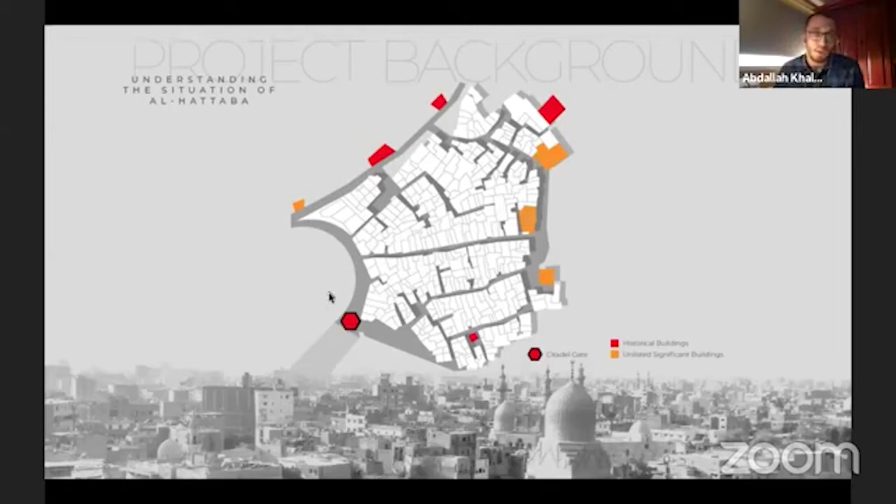It's directly adjacent to the Citadel in Cairo, so it completely lies within its buffer zone. To understand the situation of Al-Hattaba, it has several historical monuments marked in red in the layout here.

It also has a significant urban form, considered a heritage in itself. Also, it's home to many crafts, most dominantly carpentry, mother of pearl inlay, and khayamiyya.

However, in recent years, the Citadel Gate in Hattaba got closed, marked here in the red polygon. This led to various issues, such as financial struggle for the crafts, and everyone working in tourism is now more or less looking for something else.

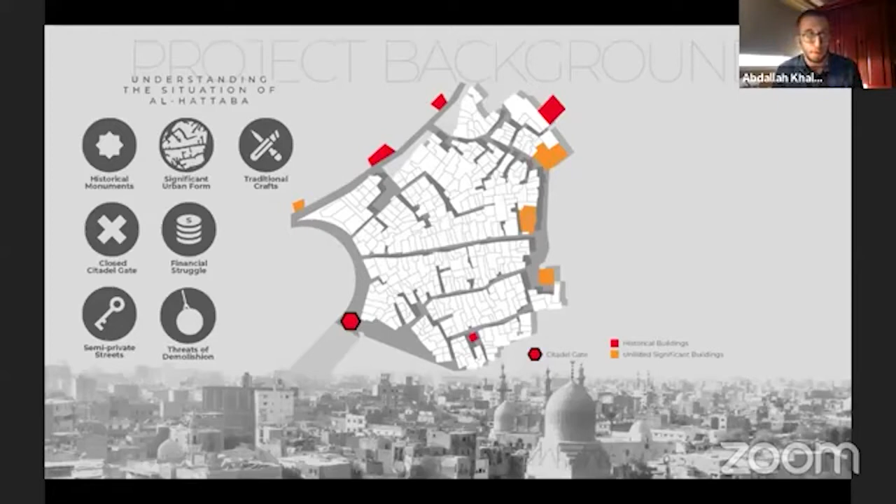The streets were turned into semi-private areas for the residents, since no tourists or outsiders are moving through them. Even the residents are facing threats of demolition from the government for several developmental projects and so on. However, none of them has been realized so far.

Also, there are building restrictions, since it's in the buffer zone of the Citadel — no one can build on vacant land. It's very hard to refurbish your home, modify it, or so on.

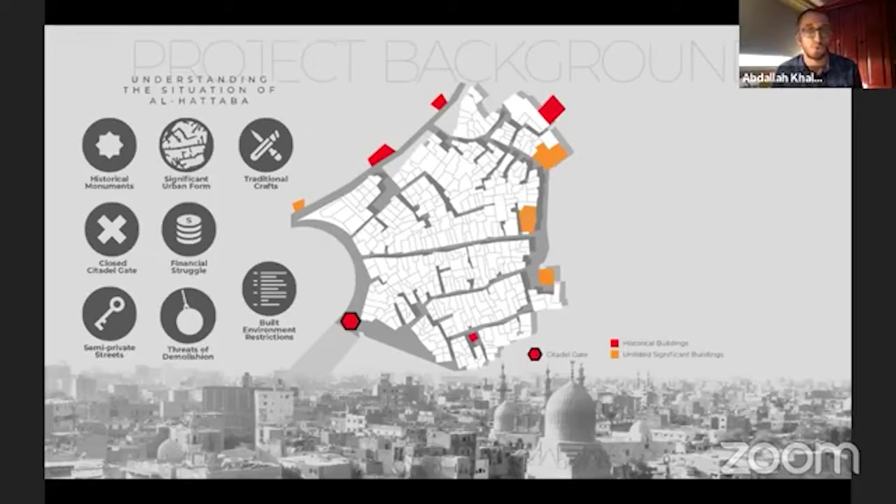However, in recent years, several initiatives kicked in with projects that got accepted from the government. The most dominant is the project from Athar-Lina.

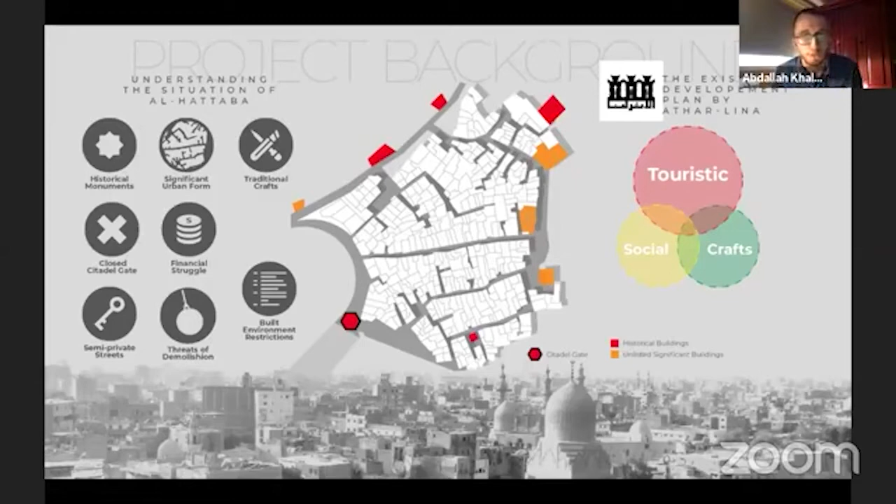It's a touristic social crafts project, mainly aiming to establish the red zones as touristic areas so tourists can move around Al-Hattaba, passing through the historical buildings, the green area as a crafts area, and the yellow area as a social area with some services such as police departments and so on.

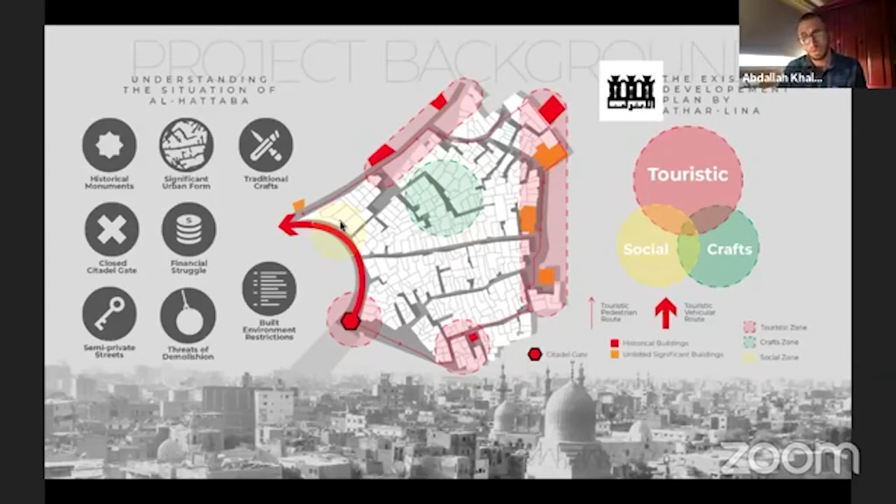So we started thinking, what's next for Al-Hattaba? There's this general theme that emerged: Al-Hattaba, as a plan for the future, has the tourists on the periphery and residents on the inside.

So we started to think more about the residents — how the inner streets of Al-Hattaba can accommodate them. The residents became our main stakeholders, with the craftsmen as secondary, and even the neighbors and the government as secondary stakeholders.

Our target impact is 4 axes. The first is functionality of the neighborhood for the crafts and for the residents. Second is identity, emphasizing it as unique and pleasant. Third is the financial return for the residents.

They are already drained financially because of the past years. And last is providing a leisure mood for the residents, in order to give a more livable area.

So our project, or our scope — we started thinking that Al-Hattaba is a multi-issue area. We cannot provide one solution for Al-Hattaba to imagine it better for the residents. So we decided to solve it issue by issue, providing an abstract guide to interventions in Al-Hattaba.

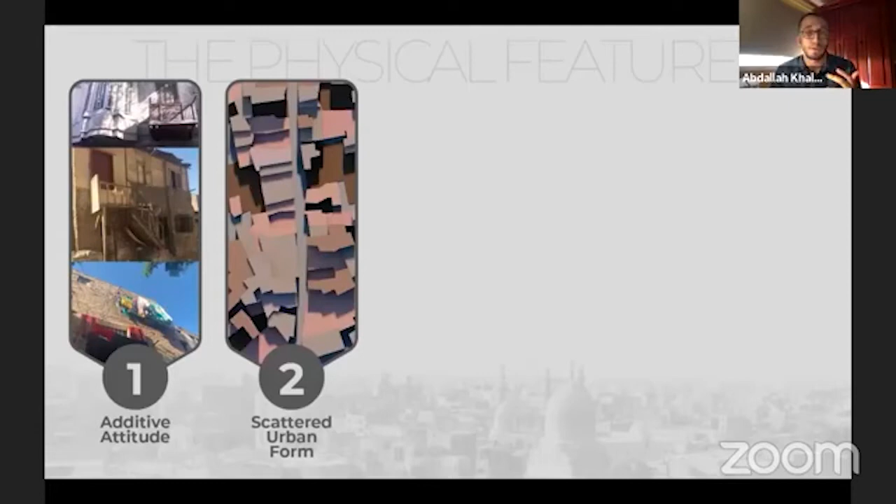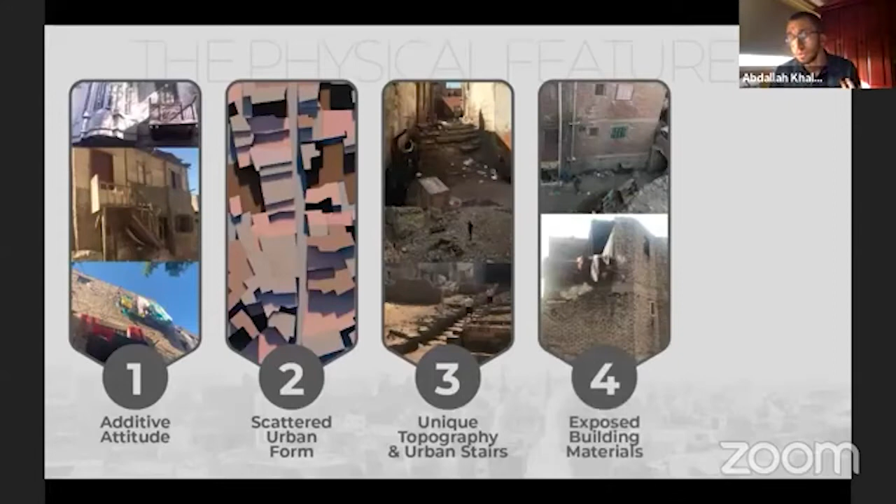Third is unique topography — Hattaba has very steep topography, leading to stairs on the streets and so on. Fourth is the exposed building materials; we will have more details about that later. And fifth is several dead-end streets on the layout.

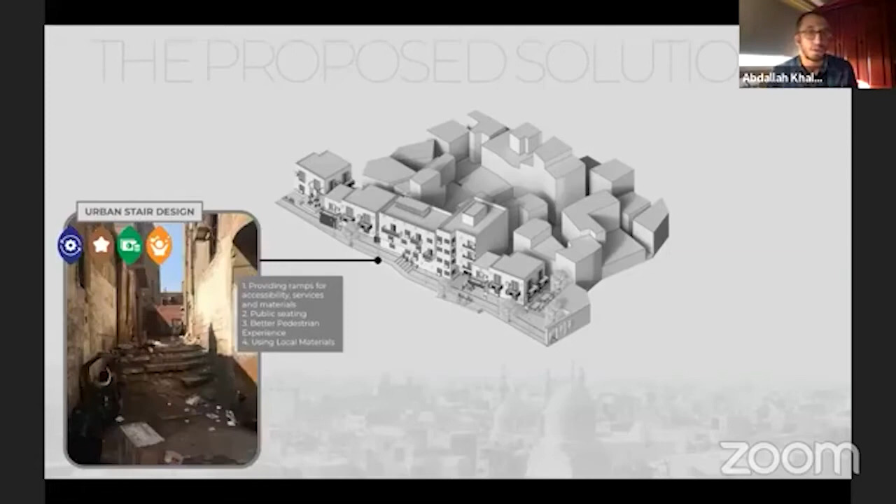So here is more of a prototypical street in Al-Hattaba with some of the physical features we described earlier. The first thing we thought about as a solution is having an urban path, how to define the path for the pedestrians and how to accommodate for the different needs.

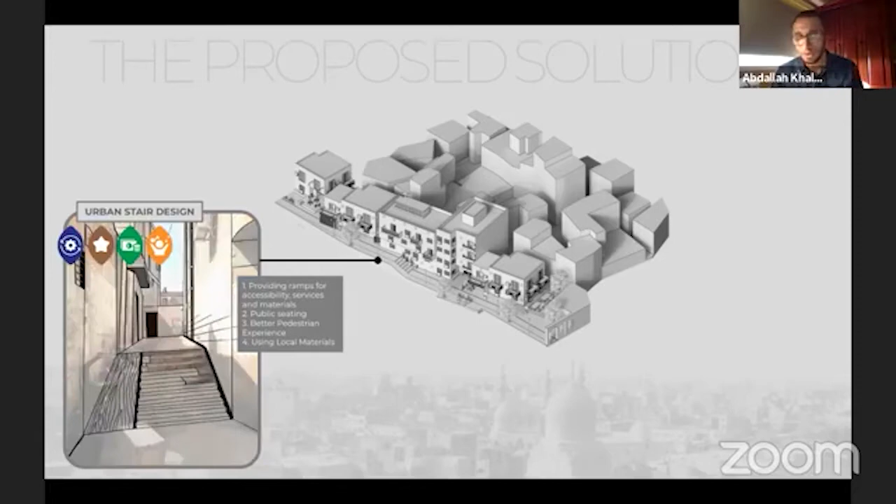So solving a prototype of stairs in Hattaba would be having a ramp for the services and materials to reach the crafts, and having seats for the residents to have this leisure mood we're talking about.

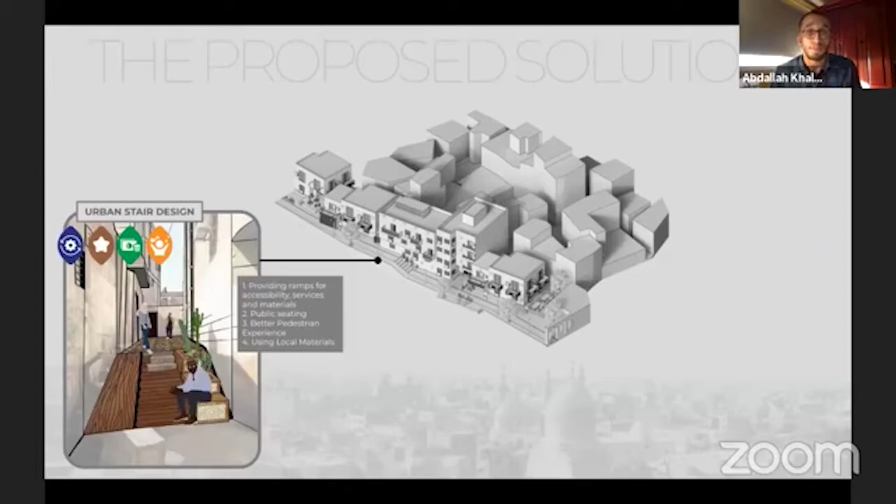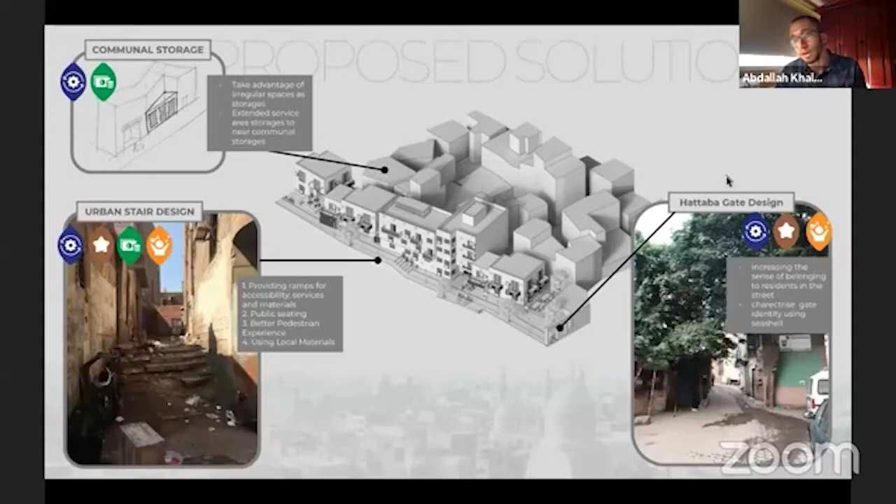Also having communal storages in the areas between the buildings. On the right here, we're talking about a proposed idea for a Hattaba gate, mimicking the gates of Cairo and so on, which will add more details to Al-Hattaba, as in more solid identity for the residents and even the neighbors.

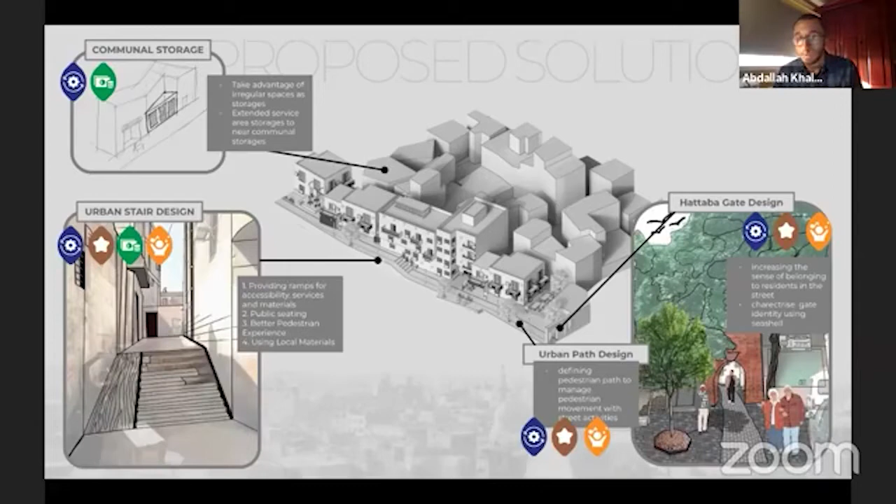Then this is the path we're talking about. It defines the pedestrian path to manage the movement and street activities. Also, we're proposing several solutions that are inspired from the crafts, such as this flooring inspired by the seashell inlay craft. Also, the dead end areas can have several solutions.

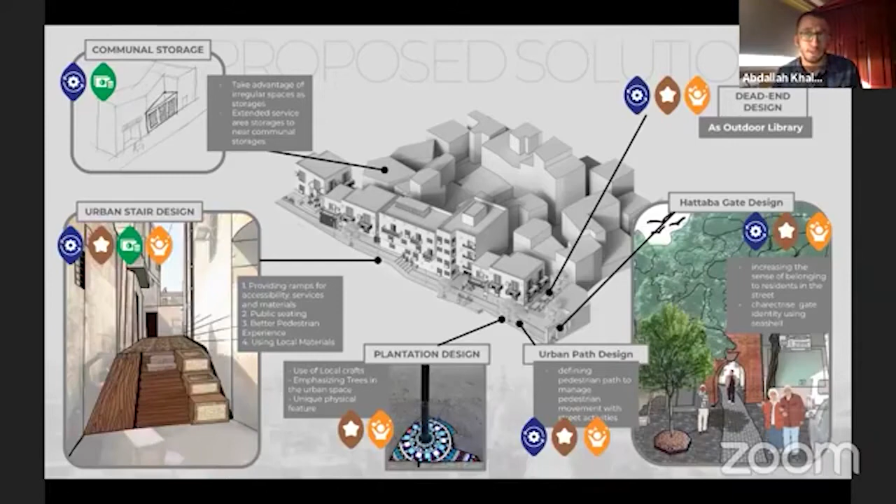One of them is outdoor libraries. We will explore more solutions about that next. That's another solution for the dead end areas.

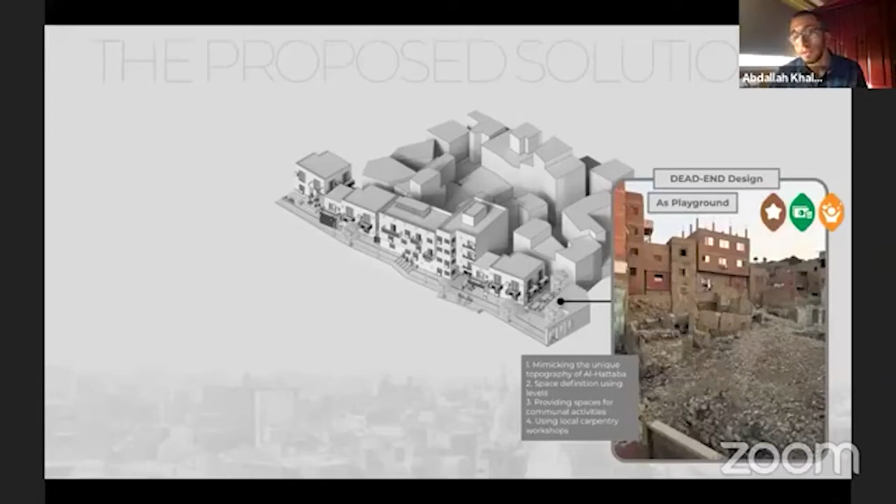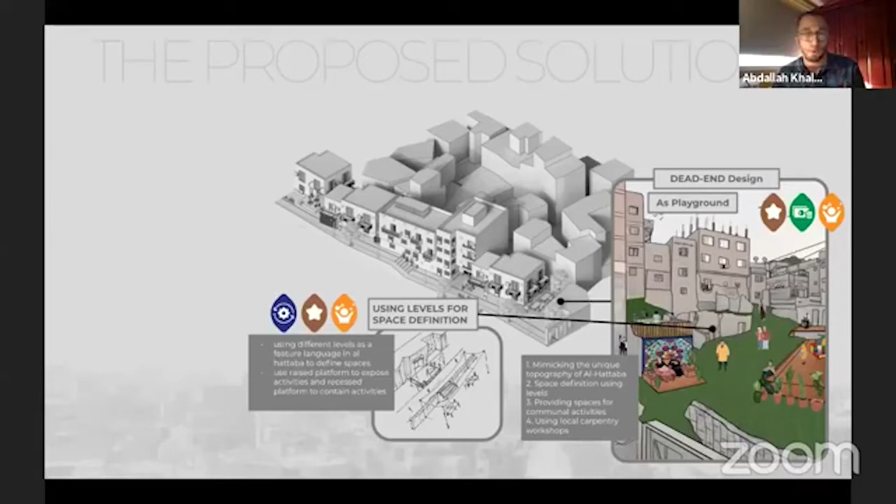Here we decided to use the levels as a unique thing about Hattaba. As stated earlier, the topography is very steep, so we started creating additional platforms in wood, maybe, so that the raised ones can be for more exposed activities, and the lower ones would be for the more enclosed.

Also, there's this culture where every craftsman usually has a relative or a friend sitting next to them for chatting during work and so on. So we decided that every outdoor crafts area should have a seating area next to it.

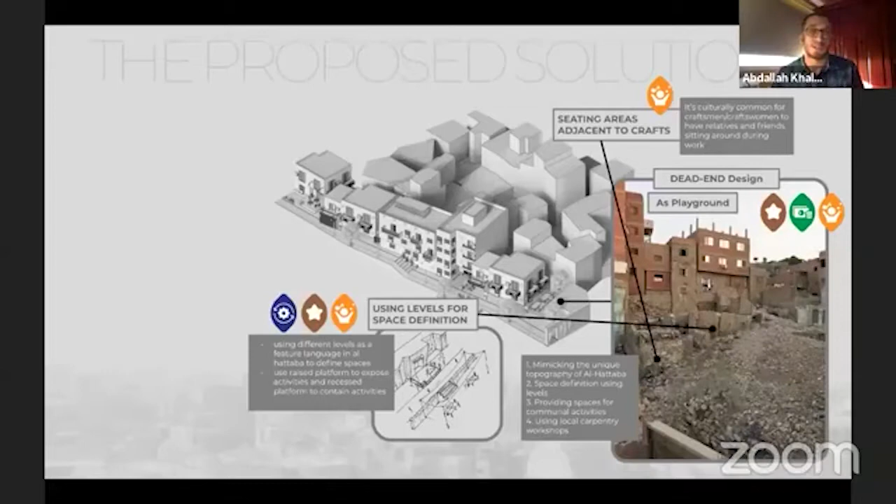Also, the plant pots design can be used for space definition and can also be made of wood and seashell inlay, or maybe other material inspired by the patterns of seashell inlay, which will be totally local made.

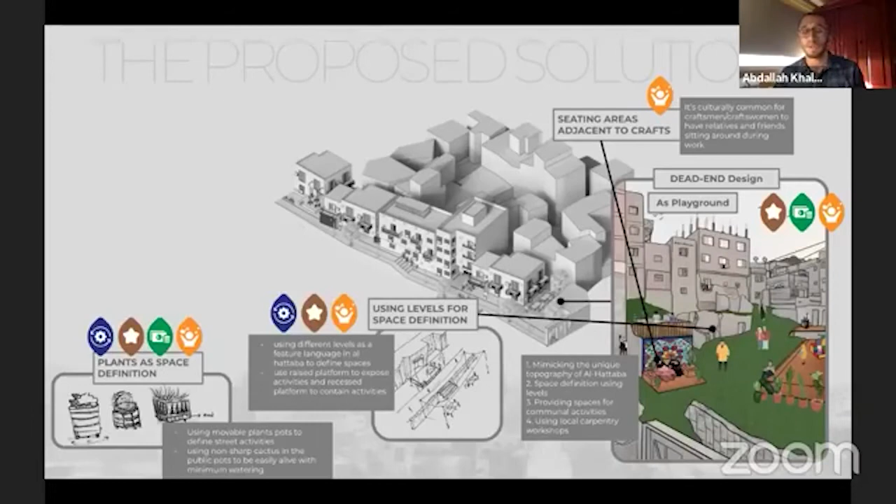Also, there is this one area in Hattaba where there is this huge stairs. We decided it would be a great idea to have an outdoor auditorium here for the local public events, such as local football matches and so on.

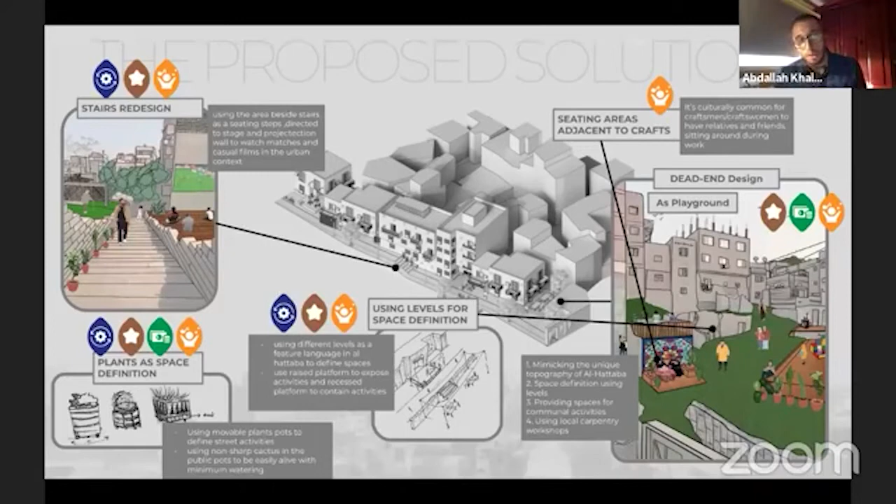Next, we started looking at the buildings themselves. As stated earlier, the exposed building materials directly get a cultural association with the slums and unplanned areas, although Al-Hattaba is considered fit to live in structural manners, so it's not a slum area, it's not an unplanned area.

So maybe the idea is that the external facade is not showing the real thing. So we decided it will be a great idea to just paint it in a suitable color, a suitable color that will be identical for Al-Hattaba. Also, maybe the doors can have keystones made of seashell inlay, or even ceramic tiles of the patterns of seashell inlay.

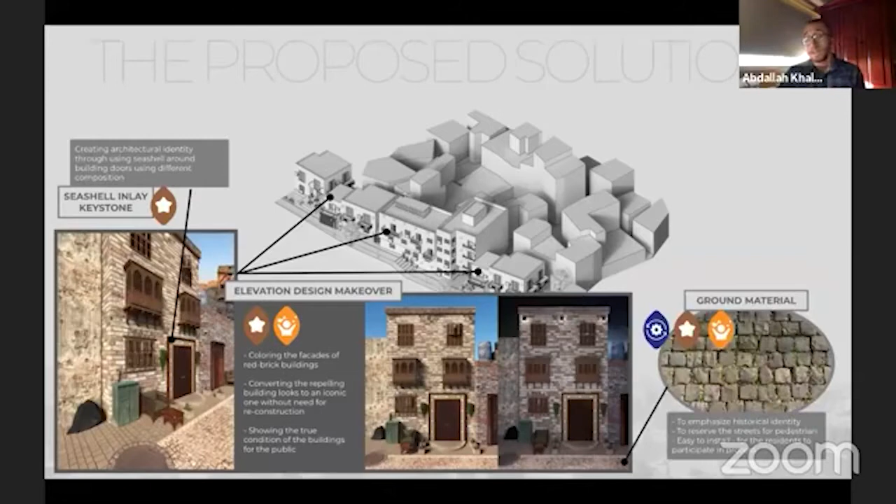Also, the ground material defining the path for the pedestrians, and defining areas between pedestrian or crafts outdoor areas.

Also, the lighting design, having Al-Hattaba as a well-lit area at night can affect it more, especially for the cultural association with the area.

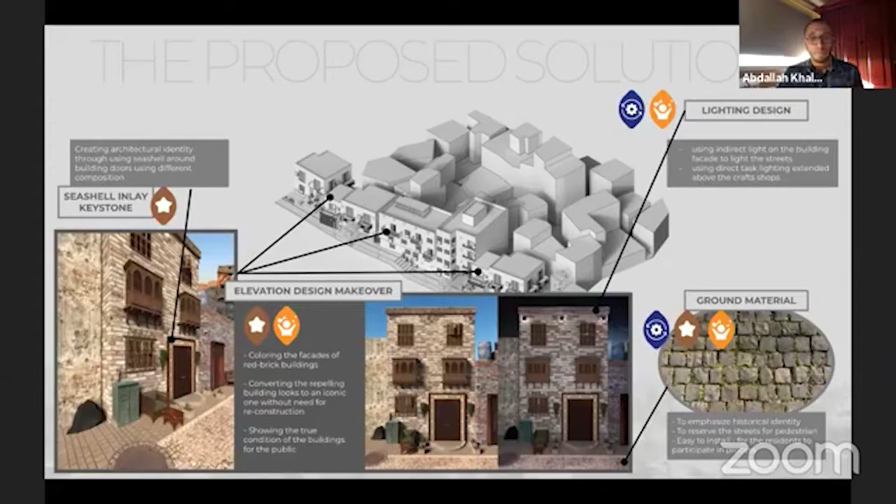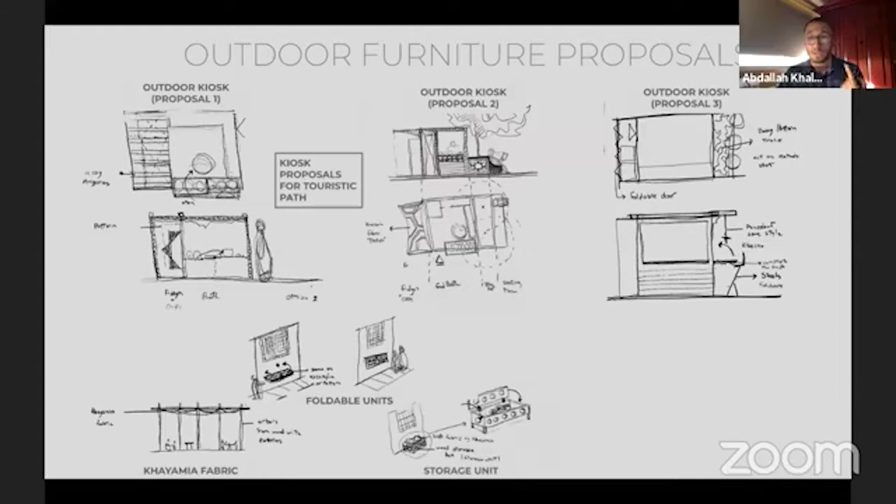Here we're proposing several outdoor furniture proposals. This is three options for kiosks on the pedestrian touristic route. The one on the bottom left is a shading device using khayamiyya, and we're proposing several others like foldable seating units, storage units, and even a proposal for a food cart that can be identical for Al-Hattaba.

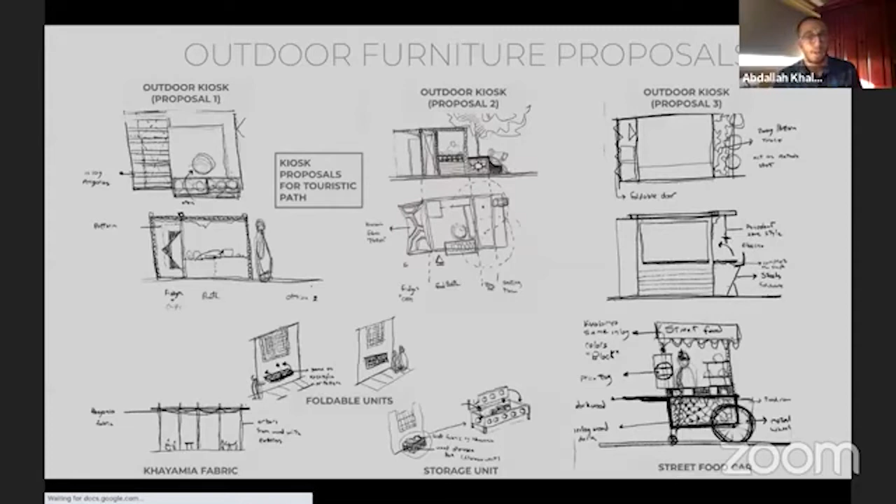In this presentation, we tried to have a more real approach to Al-Hattaba, responding to the residents and their needs. We hope that our goals have been met, and I would like to hear your questions.